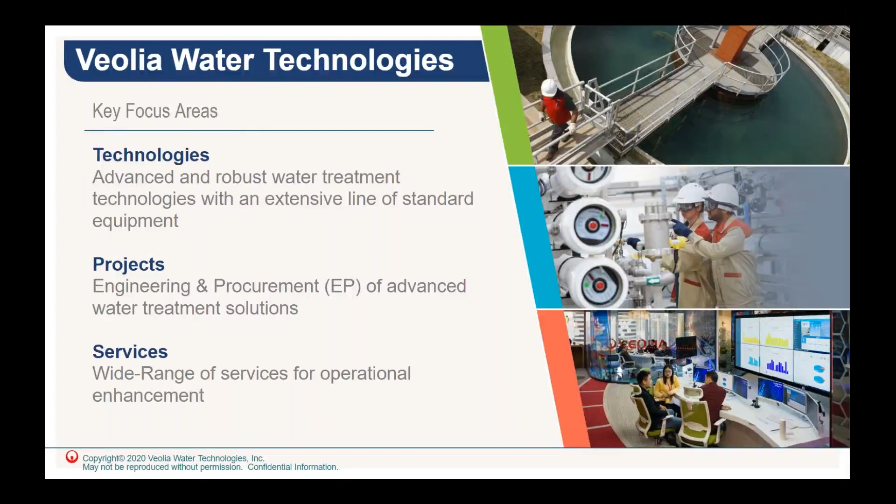First, we'll talk just very briefly about some common wastewater challenges. Then we'll drill in a little bit on the facility, with some background of the plant that we're mostly going to focus on today. We'll talk a little bit about the actual treatment technology that they employ, and then we'll really move into a discussion on the digital solution that they have implemented, and talk about the results that they've seen at that facility.

So, we have many challenges that our treatment facilities face around the world. Here in the US, in Europe, in Asia Pacific regions, we all have to deal with increasing loads, meeting compliance set forth by our national, state and local governments. And we all have operations costs that we are trying to reduce. Those are some direct challenges that we deal with.

We have indirect challenges that we deal with, and these have become more and more prominent every day, and that is changes within our workforce, turnover among our operations staff, the need to better train operators and to give them better tools to keep our facilities running smoothly. And a big part of that is taking data, and we have more data today than we've ever had before. We have better data, more reliable data, and being able to take that and get the most use from it.

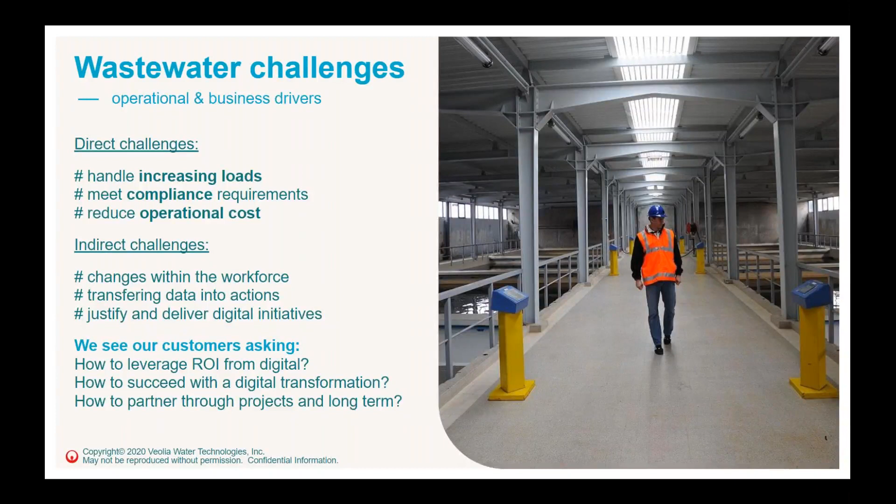To make the lives of our treatment facility operators and managers better, to improve performance, improve compliance, save money, etc. So the way that we do that is we focus on things that reduce energy costs, reduce chemical costs, and make manpower more efficient.

We focus on solutions in the digital world that will allow us to improve hydraulic capacity, and we see that in a number of ways. That is managing things better in collection systems to reduce overflows and reduce bypasses, and to get more flow through our facilities, doing so while hopefully avoiding significant capital expenditures, i.e. putting in a bunch of concrete.

Hand in hand with that, oftentimes there's a need to increase biological capacity. With the right digital solutions, we can affect change in that area as well, allowing facilities to get a higher biological load, more BOD, more ammonia through existing infrastructure, and do so with better effluent quality, reduced OPEX, and also avoid CAPEX - again, avoid adding concrete where we don't necessarily need to.

And we can affect change by increasing capacity in sewer systems. Again, that comes down to how we manage flows within the sewer system. That isn't so much the focus today, but it is an area where we can certainly have an impact.

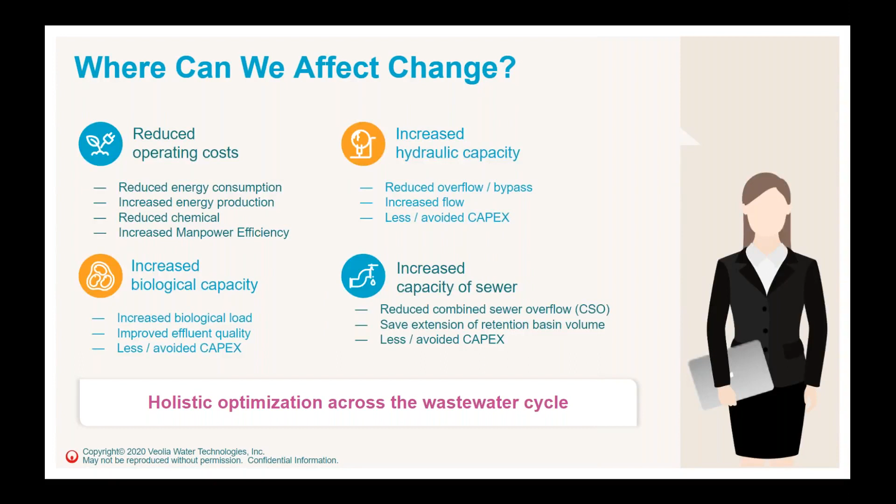So I want to talk now a little bit about the facility that we are going to focus on today. Louis will correct me, I'm sure, if I make any mispronunciations, which I'm likely to do. I do that with the English language plenty of times, so Danish - it's going to happen.

The facility we're going to see a little bit of information on today is in the Koge region of Denmark, an area just south of Copenhagen. You see a nice picture there of the harbor in that region. It's around 40,000 population in the main municipal area. The surrounding region that feeds to the treatment plant is about 65,000 people.

The facility we're going to talk about today is served by Klar Forsyning utility - I'm sure I just got that wrong in terms of pronunciation. The treatment plant they operate actually serves 4 municipalities, Koge and 3 others. Altogether, the capacity of the plant is about 5.3 MGD, and population equivalence is around 100,000.

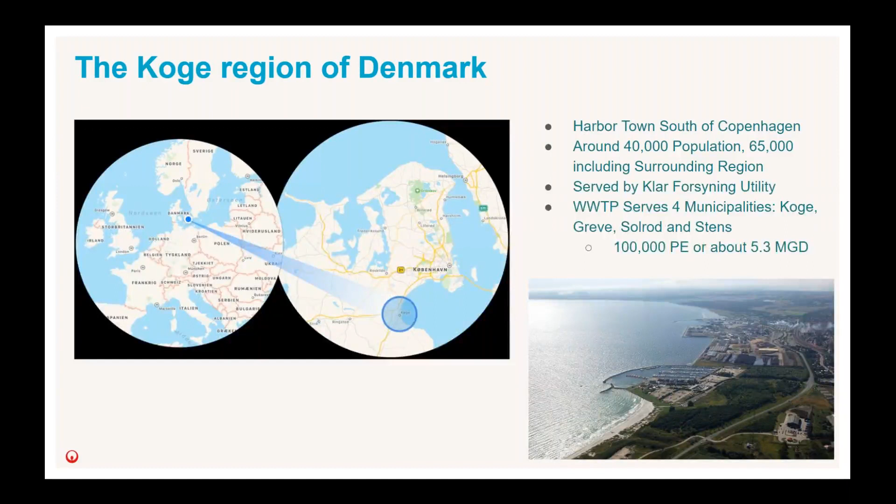Now, wastewater treatment in Denmark - they have a rich history in wastewater treatment. The Kruger business that Louis works for, I think, was started up around 1903 in Denmark, and has served Denmark and Europe and beyond for over 100 years now. So they have a very rich history in treatment.

In Denmark specifically, they really began implementing nutrient regulations in the 1960s. You can see here how they've had an impact on nutrient emissions with the implementation of nutrient standards back in the late 1960s. Many of those facilities, including the one we're talking about today, utilize oxidation ditch technologies.

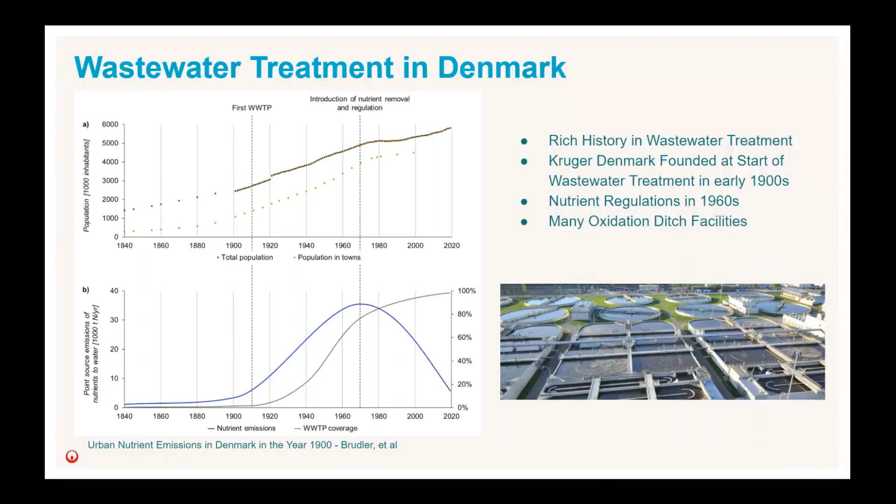I wanted to give just a brief introduction into a specific type of oxidation ditch technology that's employed a lot there. There are a number of facilities of this type in the United States as well. That is a phased isolation ditch technology.

Whereby you operate the system in a way that has a control strategy allowing the full volume of each ditch or reactor - there are configurations that do not utilize the racetrack style ditch, but utilize more conventional rectangular concrete tanks - to operate that entire volume either aerobically or anoxically, and also allows the system to flow in series through the main reactors, or in parallel, or just through one of the reactors, allowing another reactor to be fully isolated.

Here we see just a simple schematic of that process in oxidation ditches, and on the right you see a system currently under construction in Kansas that is 2 trains of the technology, train 1, train 2. These are some sludge holding tanks. This is post-anoxic zones. That technology is about a 4 MGD plant in Kansas that's under construction now.

And that will feature the AQUAVISTA Plant digital technologies that we're going to focus in on here today.

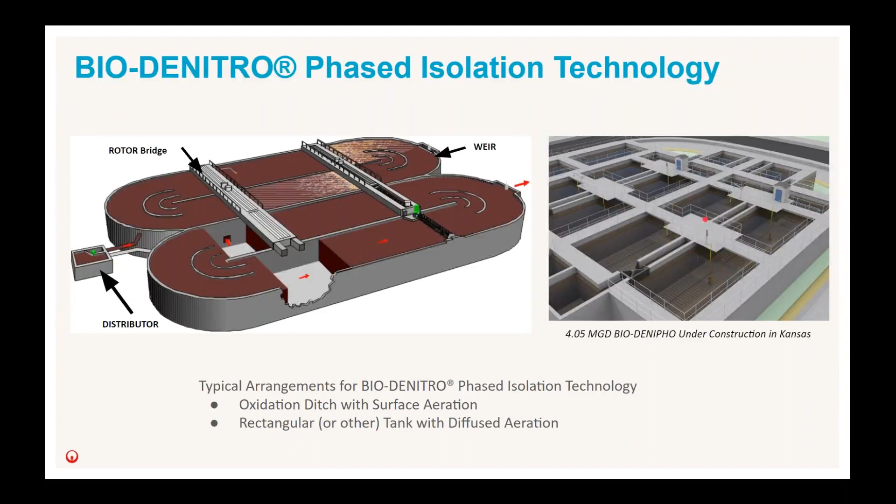A way to think about that technology is it falls between typical continuous flow processes, where you have continuous flow through the system and there's no phasing generally of the aeration. You have dedicated zones for an anoxic zone, a dedicated zone for an aerobic zone, and a secondary clarifier for dedicated settling.

We compare and contrast that with an SBR type system, which is a batch flow and phased aeration. Some of those systems do have continuous flow in, but they all will incorporate settling in the reactors, so it's intermittent discharge. They go through a phasing of the aeration to achieve aerobic and anoxic conditions in the full volume.

With the technology we're talking about, the oxidation ditches, they have separate mixing and aeration, so they do phase the aeration, but they are not generally settling in those reactors. They utilize conventional secondary clarifiers, so they are continuous flow processes.

But we do change how the flow goes through, so we can really manipulate it, and it brings a lot of flexibility to the system to deal with variable influent and variable conditions, and get the right reactor environment in the right place at the right time, to take as much advantage of influent carbon as we can, and to really drive nutrient values down to the lowest levels that we can.

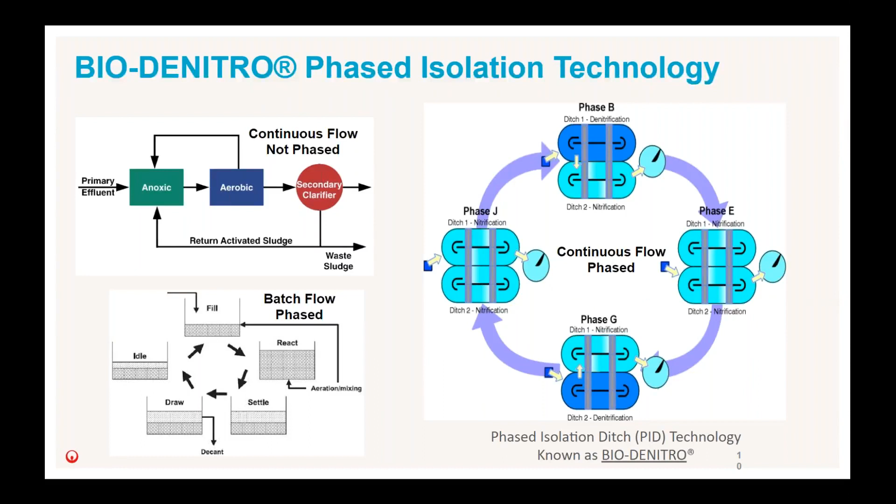So let's drill in here to the Koge plant in Denmark. That is a 5.3 MGD ditch system, as I noted. They have primary clarification, and their limits in place are 8 total nitrogen and 1.5 milligrams per liter of total phosphorus. So not super stringent on the phosphorus, but there is that limit in place.

They have undoubtedly experienced more and more an increasing level of I&I over the years, as they are seeing sea level rise to some extent. So that part of it is calling for some solutions that help them manage their wet weather better, and we'll talk a little bit about that.

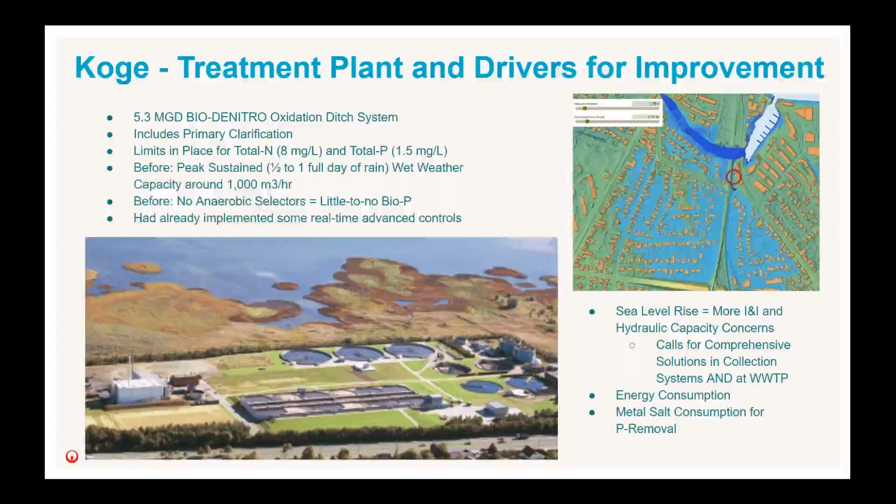So all of these things together combine to create room for a lot of optimization, and there are different ways to approach that optimization. The facility tried different meters to help with energy efficiency, and they tried that real-time control. They didn't see a whole lot of improvement with that.

With the sea level rise, they've experienced clarifier washout events. So some of the other solutions you might think of off the top of your head: add some additional secondary clarifier volume, or add anaerobic selectors, or add additional retention basins out in the collection system to equalize wet weather flows, and go that route to minimize sewer system overflows and better manage flows as they come into the plant.

And from a total nitrogen perspective, add potentially additional treatment volume. So all of those types of solutions come at a high cost—a high capital cost—and don't necessarily address energy efficiency or excess chemical costs. Those are pretty significant projects to undertake.

So the question was, is there a way to approach all of those issues with a digital solution and have an effect on energy efficiency, on chemical consumption, on biological phosphorus removal, on management of wet weather flows, and do so without putting in all of this concrete and rebar and additional infrastructure? And it turns out there absolutely is.

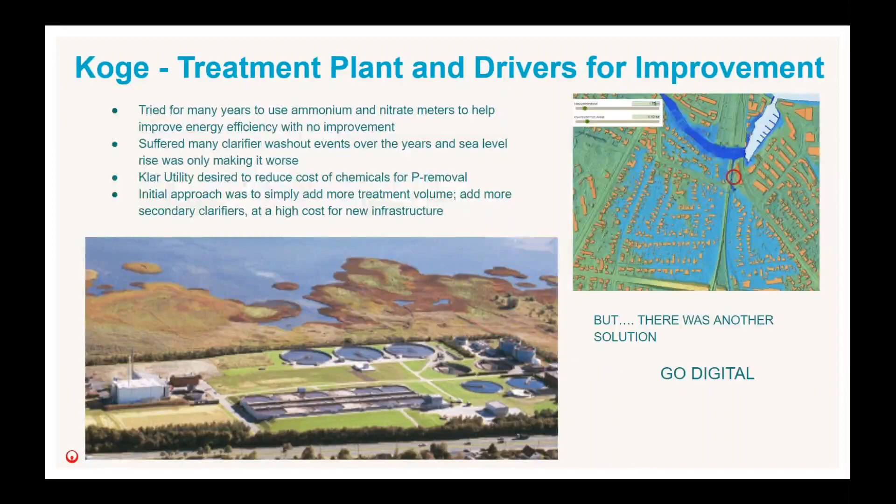We have implemented what we call our AQUAVISTA Plant, which we view as optimization as a service. And with that, I want to turn it over to Louis to talk a little bit in detail about what we offer with AQUAVISTA Plant and what it is.

Thanks a lot, Mark. Great introduction. Thought you also did well on your Danish.

Thank you. So yes, AQUAVISTA Plant Optimization as a Service. What I mean by that is, this is a tool created by Veolia Water Technologies and Kruger, developed over the years. This is a digital tool that really aims at answering all the problems and issues that Mark highlighted earlier. So it's both something that can deliver optimization for wastewater treatment on OPEX, but also on CAPEX savings.

And as you see on the half wheel on the right side of the screen, you can choose to have the product provide the service with different aims. So it can be regarding the water quality in the effluent, it can be regarding the chemical dosing - pretty much as Koge, where they were dosing quite a bit of chemicals to reach their P consent - the biological capacity, and the energy savings that Mark talked about.

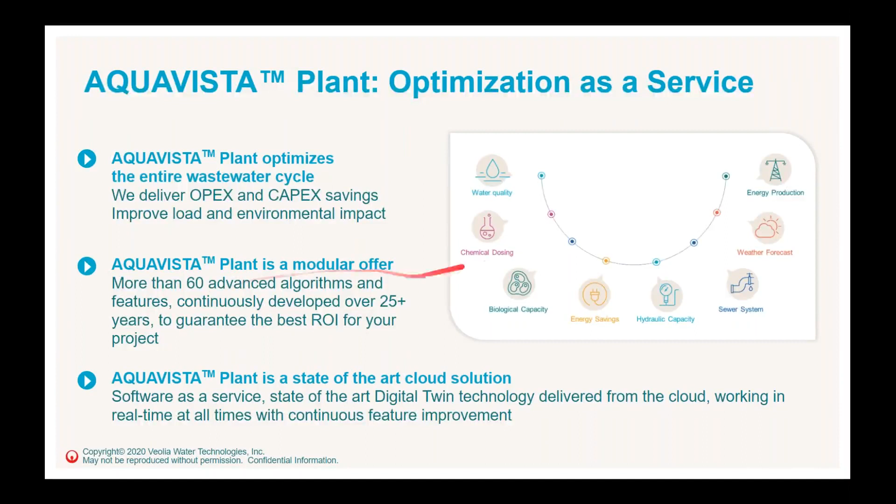So the system and the platform is built in a way that it can adapt to any kind of needs, so that supports this modular offer. There are embedded into the platform more than 60 different algorithms that have been developed over time. The first ones were thought of back in the early 90s, and since then they've only been getting better and more innovative, and we've kept on building on it to provide this optimization.

And any plant can identify their problems and then put together the right mix and match of algorithms to provide the best ROI, basically, on a project to solve this issue.

So AQUAVISTA Plant is a digital product, as Mark said, so it works as a software as a service. You guys are probably all very aware of it - it's kind of like your Netflix account. You subscribe, you get the service, and if you're happy, you stay subscribed. If not, you unsubscribe. So it's a very user-friendly tool and way of looking at optimization for wastewater treatment.

It's based on a state-of-the-art digital twin technology, so it's really creating your whole plant up in the cloud to best provide real-time optimization delivered from the cloud to your asset. And it works in real time, so everything is updated, calculated and rerun within a 2-minute time frame. All the data put together in the algorithms is running 24/7, 365, to always keep track of how the process is going.

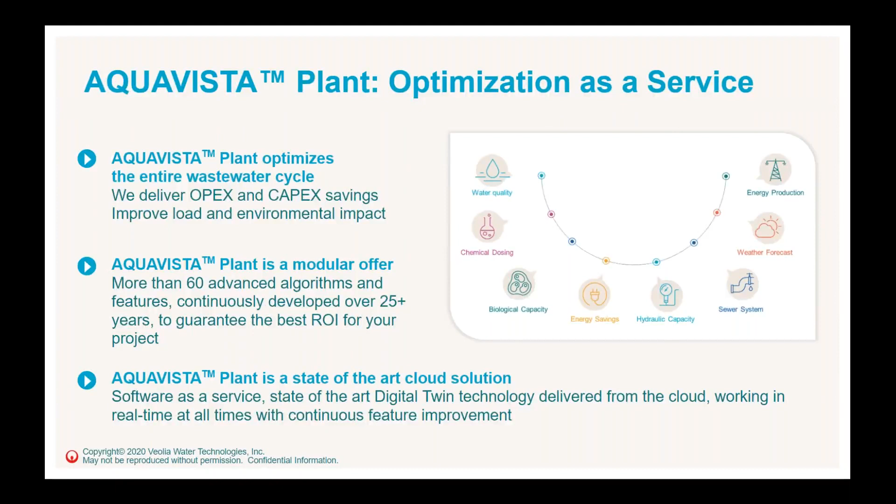Thank you, Louis. So with this digital service, as you mentioned, there are more than 60 individual algorithms, and we have facilities where we've applied just 1 or 2 that are really targeted on one specific technology or one specific product, to implementing a dozen or more of the algorithms that are all working together to optimize across a range of unit operations in a plant and out into the collection system.

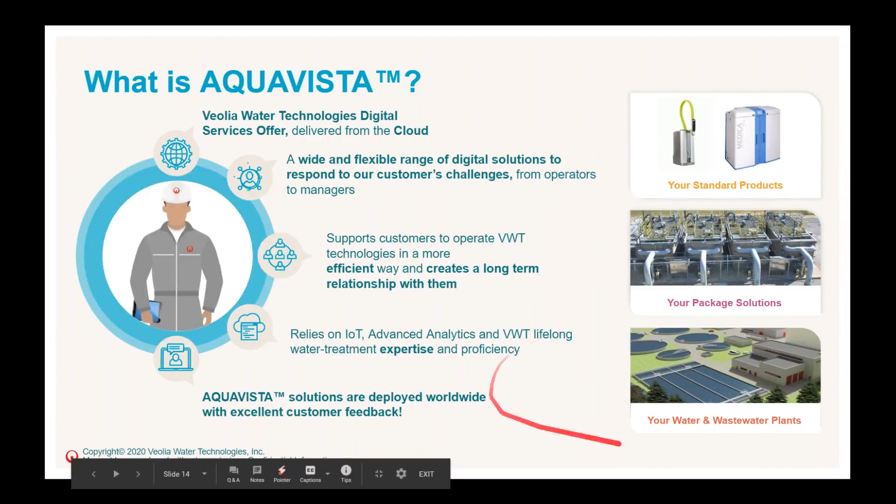It all relies on IoT, advanced analytics. As Louis said, we have these algorithms that have been developed that are running this digital twin in the cloud. We work through Amazon Web Services to deliver this to the facilities, and it has proven itself in dozens and dozens of installations over the years to deliver very high results.

Just one quick mention about some of the logistics of how it works. It is a cloud-based system that is running all these algorithms. It has this digital twin that is taking all the data we're feeding in, and it's identifying in real time new set points. It may be a DO set point, it may be a blower operating speed set point, it may be a pump flow rate set point - just depends on the full range of solutions that have been implemented - and it automatically loads those into the new PLC on a real-time basis.

It includes a user interface that has different levels for operators, for engineers, for plant managers and oversight staff to view various KPIs, and can see the big picture or the very small drilled-down picture as appropriate for the individual that is operating or using the system.

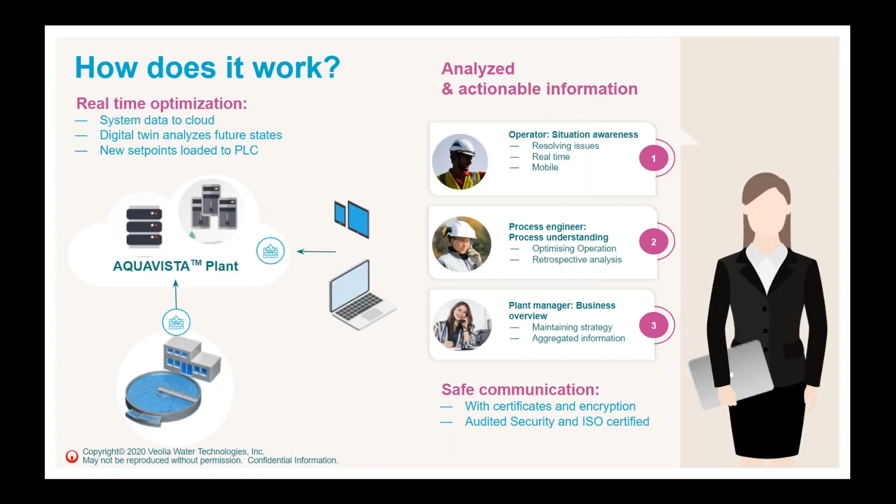Louis also mentioned it's been developed over a wide range of time. We've been doing this since the 90s, and it was implemented at that time on a server located at the plant. Obviously, there was no cloud component at that point in time, but it has been cloudified within the last 5 years. And what that does is it actually makes it much more efficient. It's less costly. And it makes it easier to take advantage of updates, as they can very easily and simply be downloaded. So you always have the latest and greatest information, the newest version of the algorithms that are running and optimizing the various unit operations.

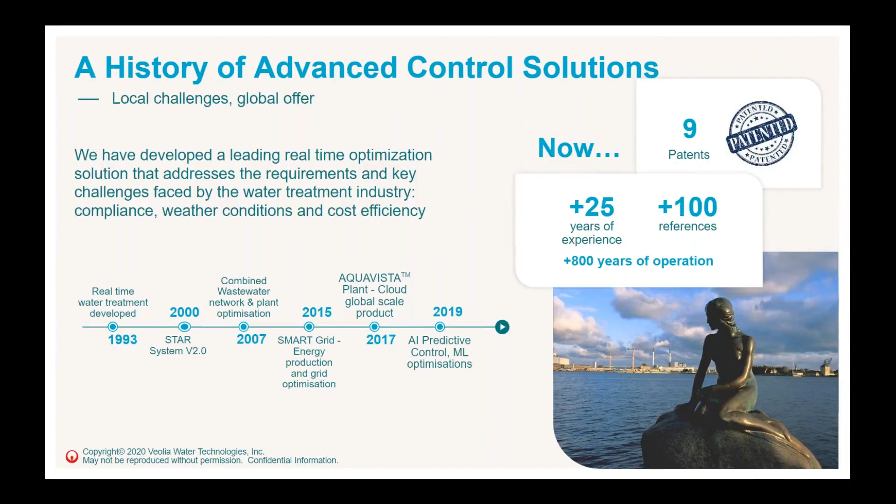The results that we've seen, just in general, we see an average of 10 to 30% lower aeration energy when we're employing it in a secondary treatment system, 25 to 75% pumping and mixing energy reduction. There are grit separation specific modules and have seen improved separation with a big reduction in energy on the grit chamber aeration. Very significant chemical savings, less sludge production because we're feeding less chemical to achieve the same types of effluent phosphorus and effluent total nitrogen.

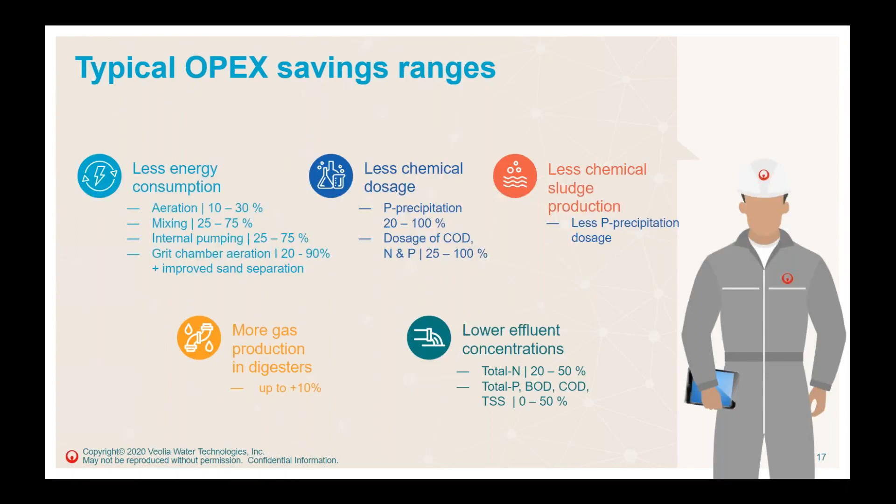There are anaerobic digestion specific modules that improve gas production. And all of these work together in any facility to produce better effluent concentrations and better compliance overall. We also see significant increases in capacity, and we have implemented the solution specifically in many instances to achieve these types of capacity increases. These being the primary drivers on a project to say avoid building an additional treatment train or avoid building an additional secondary clarifier.

So once you have the right data and you have the right algorithms, which we do, which we've tuned over many, many years, and we've done that from a wastewater perspective. At our heart, we're a wastewater company. We're not a data science company, although we certainly employ some data scientists to work on this particular product. But we're coming at it from a wastewater perspective and have done so in building these algorithms. So when we have the right data, we can affect some very significant change and improvements in these facilities.

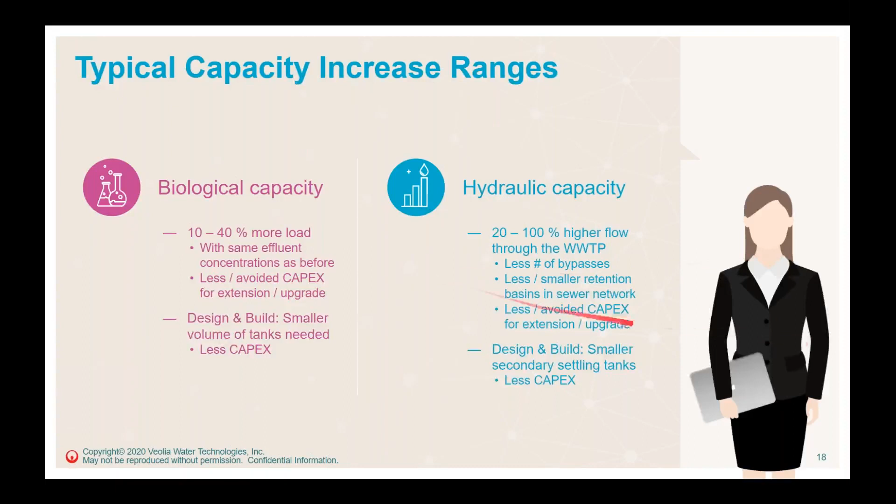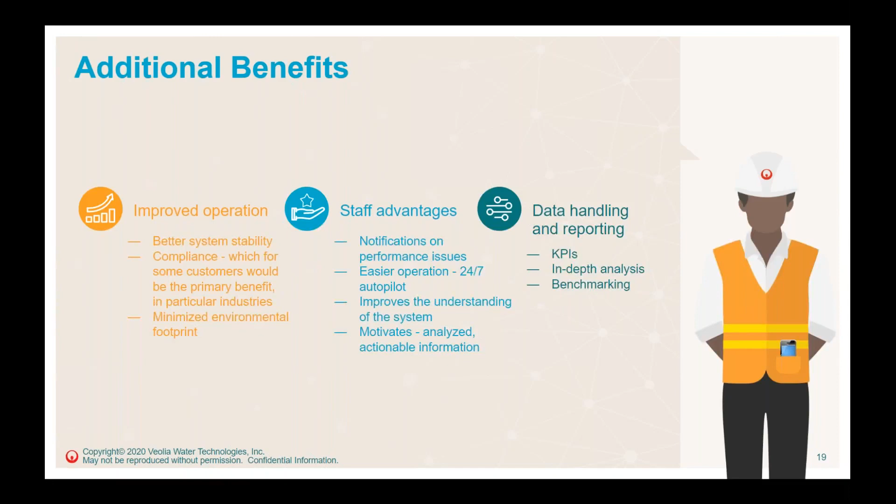And all this leads to some additional benefits beyond just what you see in numbers in terms of chemical consumption and improved capacity and those kind of things. The better compliance, more stability, better overall settling, and staff advantages, and being able to track and monitor performance better, at the big picture, at the management level. The best reference or the best tool for us is our customers, and we're always willing to get our prospective customers in contact with existing users to talk about their experience. We have I think a great track record with that.

So enough about that. I think we're going to move into some more detail here. This just summarizes really kind of the heart, a lot of the key modules. I'm not going to go through these one by one. I'm just going to pick out a couple examples, and then we'll talk in specifics about the results at the Kruger plant and what they implemented. But you can see there are modules that have been in place for many years that continue to grow and that all work together to optimize a plant. Again, at a particular facility, depending on the objectives, just one or two of these may make sense to implement. A dozen or more may make sense to implement.

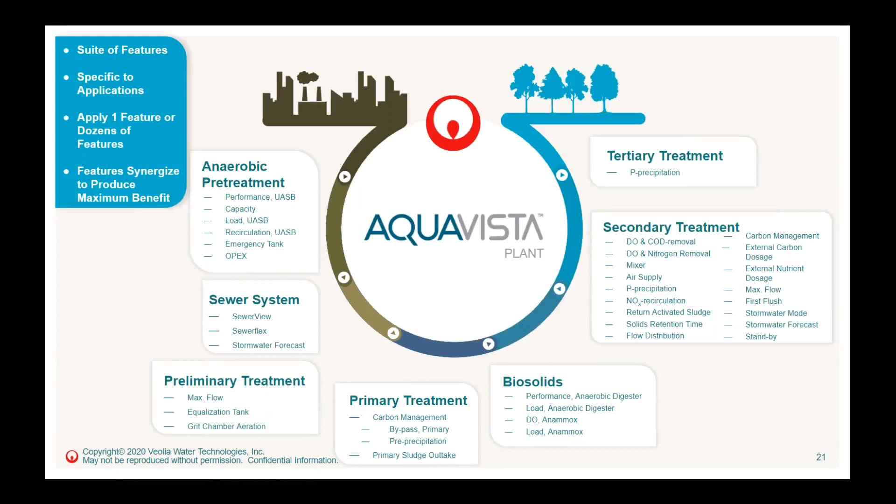The more you implement, the more it will build on each other and better optimize the facility as a whole, and also out into the collection system, and really treat the collection system and the plant as a single entity, and optimize that all at once. So I want to give one example of a common approach to where we affect change. So, there's a stormwater control module, and there's different levels of that. It can be very simple, and it can get more and more elaborate, and it all depends on the data that you have available. If you have a system and you have a certain flow capacity, say before your clarifier is going to wash out, that probably is what it is.

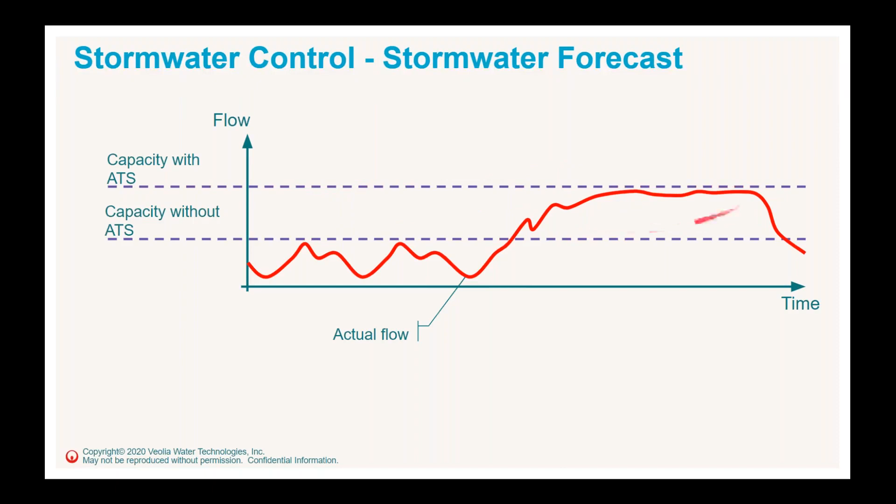And ATS here means aeration tank settling. A common method that some plants use is just to manually, if they know they're going to get washout, turn off the aeration in one or more of their aeration tanks, build up some solids there, reduce the solids loading on the clarifiers, and that helps. That requires manual intervention and can certainly be managed better and can be automated. So if you've got a plant and these are your actual flows, this whole period here above that dotted line represents potential clarifier washout time, right? Well, you implement aeration tank settling, you can head off and avoid that. But the problem is you might not implement it in time.

If you're manually implementing it, or even if you're automatically implementing it, say just off of a flow signal at the plant, there's going to be this period of time potentially as you're transitioning aeration tanks to settling where you're still susceptible to some washout. So the question is, how can we better anticipate the flows actually at the plant? And there's a variety of ways that we can affect that, and they just get more and more fine-tuned depending on the type of data we have.

So there are proven algorithms that we build in with our flow forecast that go along with the stormwater control mode that take data from rain gauges out in the collection system, from weather APIs to build forecast data in, and use those to identify when's the right time to implement some aeration tank settling, and do so fully automatically, and help that facility weather the storm, so to speak, and minimize risk of washout.

Again, that's been perfected over many years and works exceptionally well, and takes some of that burden off of the plant to try to figure out when to start implementing things. It can just go and do it on its own. So that's one example of how we're utilizing digital technology and these advanced algorithms to improve what's happening at the plant based on better data.

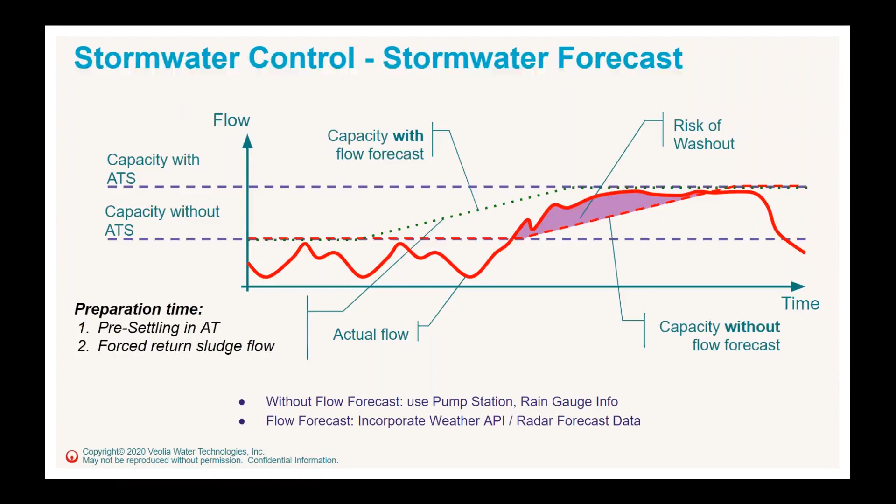We're going to get in a little bit more detail. I'm going to turn it back over to Louis to talk about specifically phosphorus removal and what we're doing with that, and the solution ultimately that was implemented to affect change at the Kruger facility. And then we'll wrap it up with looking at some actual numbers from that plant.

Thanks a lot, Mark. Yeah, so we just looked at the stormwater, and as we mentioned earlier, all these modules and algorithms can work together. The idea is to adapt the plant to any kind of situation it's in. You're going to have fluctuating flows throughout the day, throughout the year, with different contexts. So how to best adapt the process to the state it's in and maximize the use of the concrete and the assets you have there.

So a focus on biological phosphorus removal here is that we know that during a day, most probably there's going to be fluctuations in the plant, and we want to look for times where we can enhance the biological P removal in existing volumes. The idea is not to build more, it's to use it smarter, wiser. And so that's the why. And how do you do that? Well, we try to find time slots, usually during the low load time frames, for example during the night, where your plant is going to be operating below capacity. So you're going to have some spare biological capacity somewhere in there.

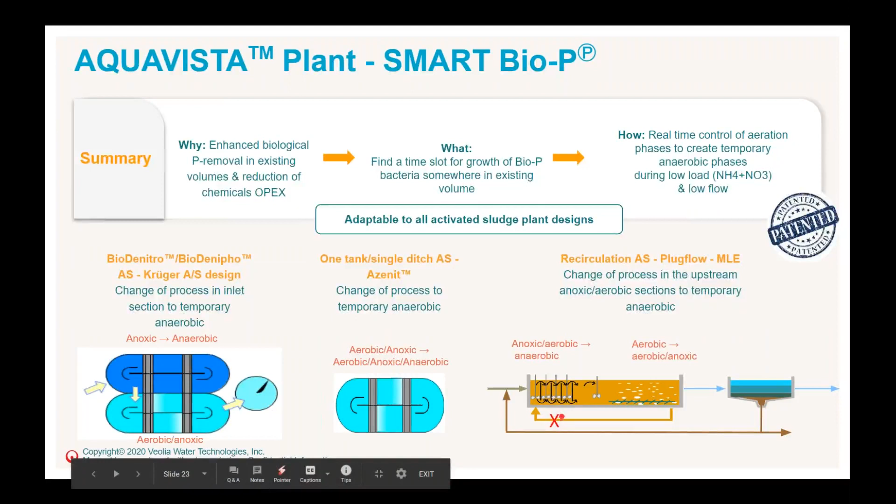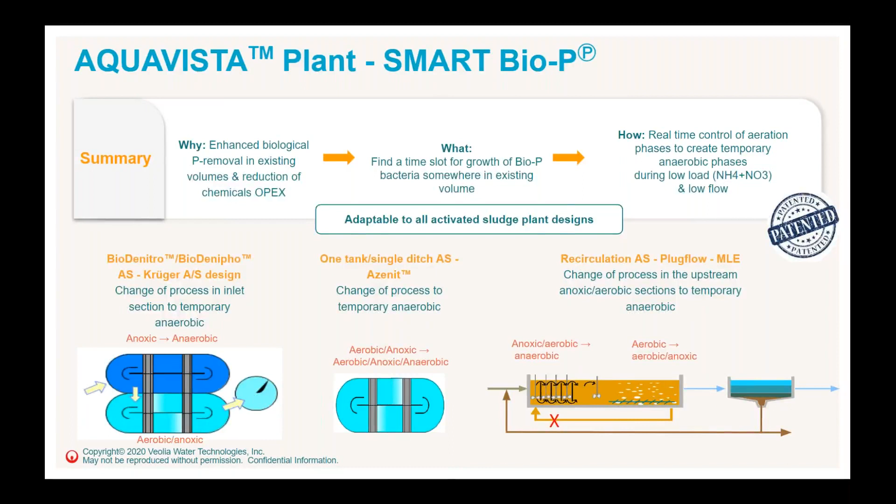You'll see with the little crossed X on the orange line there, so that we don't return any nitrates from the end of the tank to the beginning where we want to create anaerobic tanks. So we'll have dedicated anaerobic tanks in the beginning where we don't recirculate anything. And then you have your anaerobic conditions for your bio-P growth. And so that's kind of how we in live work on this stuff.

But it's not only one thing that makes the bio-P process possible. You could think of AQUAVISTA Plant somewhat like making the orchestra of your asset play in tune the best way, to play the partition correctly. So all the algorithms together are going to be better if they act according to each other and according to what the process needs.

But if you also have mixers in your anoxic zone, you might have a second algorithm and a second feature adding on top of it as an additional benefit to stop the mixers, to increase the hydrolysis rate. So you'll have an increased hydrolysis rate and you'll be saving on your energy by not running your mixers.

Ultimately, also, all your process is based on how much bacteria you have in there. So that's your solids retention time and your return activated sludge. You want to make sure that you have the right sludge age and the right sludge amount in your tanks to do the bio-P removal, to reach your compliance in the effluent, and not have to over-aerate by having too much sludge in the system. An algorithm like that will make sure that you have the right balance between those three.

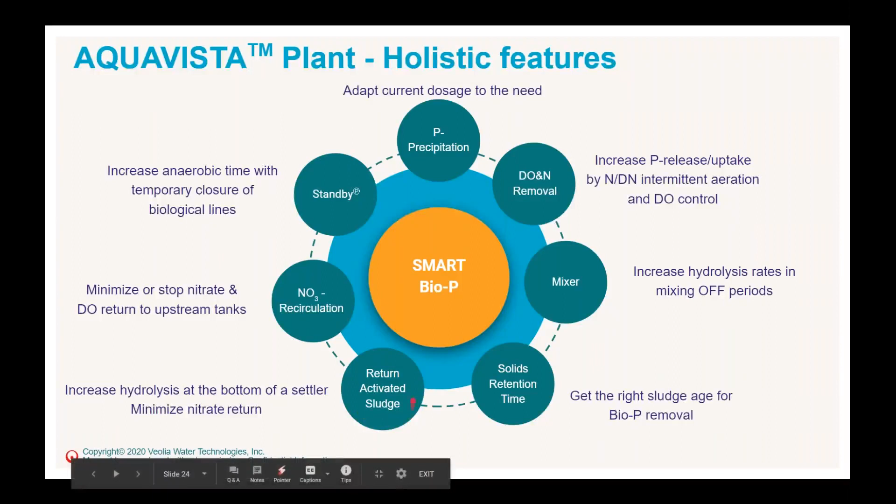Same with the return activated sludge. So how much are you pumping back? Because sometimes you don't want to be creating unnecessary constraints on the system by returning too much. So here you could increase the hydrolysis at the bottom of the settlers by minimizing the return rate.

In our recirculation plants, as I showed before, you have your internal recirculation, your nitrate recirculations. Well, you need that extra feature to play together with the DO and N removal feature in a recirculation plant to make sure that you can achieve this anaerobic condition in the beginning of your aeration tank.

The two final ones in the wheel here: there's another patented feature, standby. Essentially, if you have a plant that sometimes is operating far below its design capacity, you might actually be able to just do the job on half the lines. If you have two lines, you could maybe just do it with one and save a lot of time of operation for aeration and mixing.

But essentially also, if you can put a separate line in total standby, in pause for a couple of hours, that is always dynamically in real time able to come back into operation if the load to the plant requires that, well, you're creating one huge anaerobic volume for your plant to prepare for the process at a later stage. And this is done dynamically. So it can be one line, it can be the other, it can be for just an hour, it can be up to 4, 5, 6 if needed, always dynamically ready to come back into operation.

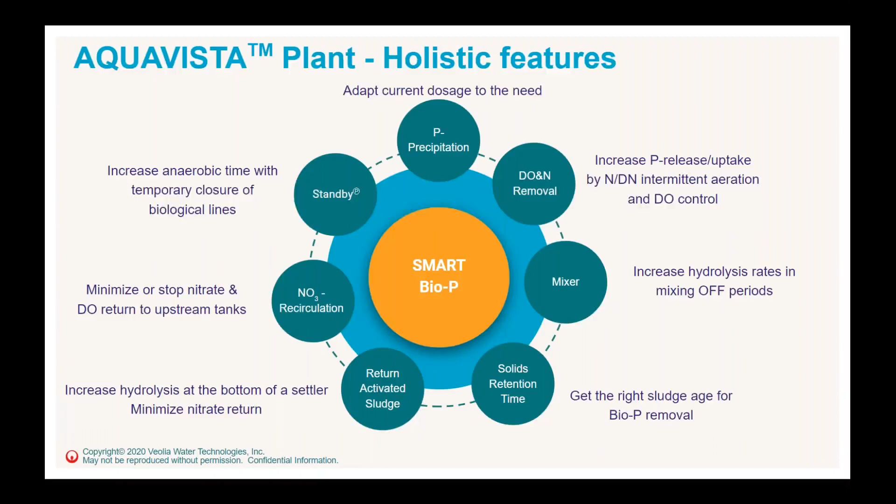And finally, if the whole bio-P process can't take it all, you're going to have to dose something. And let's just make sure you don't overdose by having a P precipitation algorithm telling your pump, well, now we need to dose this much. Not too little, not too much. So it's all well and nice.

We've kind of gone through the logic behind how we provide this optimization. How do you make it possible? What did it look like in reality for the Kruger plant here? So as Mark said, it's about 100,000 PE, and they were really struggling with three main things that I'll repeat to you guys. So first of all, in Denmark, you have to provide operational savings every year. That's the requirement from the government. So every year you have to think of a smart way to save a couple bucks.

That was one of the issues. The second one is that, as Mark said, they were struggling with the sludge escape from their secondary settlement. And not only were they struggling with the secondary settling tanks during stormwater events, they were handling everything manually. So the guys at the plant sometimes needed to wake up at 4 in the morning and get to the plant, all hands on deck, to try and get the plant through this stormwater event.

Denmark's a very rainy country, so really when it rains, it pours. So this was also a strain on the operational team, that every time there was rain, they needed to come to the plant and make the best of whatever they could there. So those were really the 3 main drivers at the beginning.

And by using 9 of the different features, some of which are the ones that we showed you before, so DO&N removal, solids retention time, return activated sludge, and P precipitation, for example. Those are a couple of them. Stormwater, of course. We replaced the existing real-time control that they had implemented, which was delivering just very little OPEX savings. That was pretty much what they had achieved with that.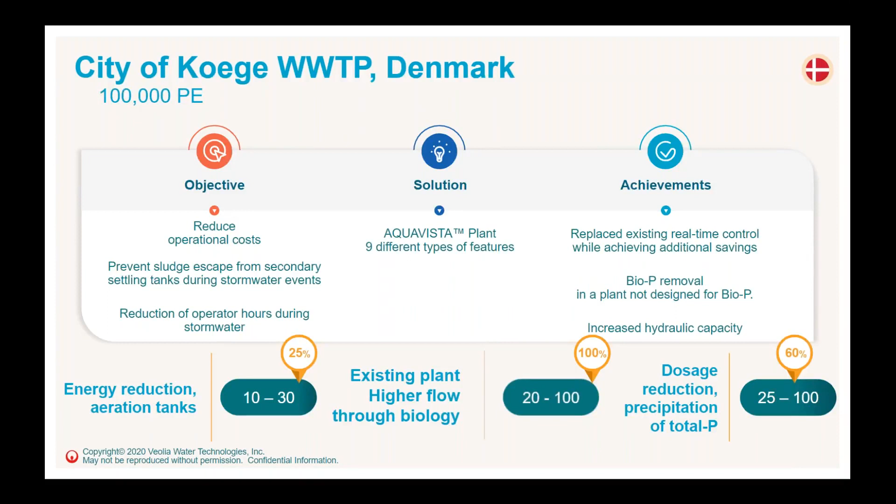Absolutely. And you had also mentioned, being in the cloud, the ease of delivering added value through additional modules, additional algorithms being implemented down the road. They're adding a couple new ones. I want to wrap this up with just one final thing. One of the ways that we do that, and they haven't implemented this at that Koege facility, is what's called AQUAVISTA Lab, and this is a collaborative platform that allows our AQUAVISTA Plant customers, if they choose this option, to work on and develop their own algorithms,

and we can essentially partner up to identify new ways to set up advanced control, and in the digital twin environment that's created in the software, be able to fully test it and confirm how that's going to work. And that is, I think, a very neat feature to add some value on top of what's already generated and what we're generating as time goes by. So just wanted to make one final mention of that.

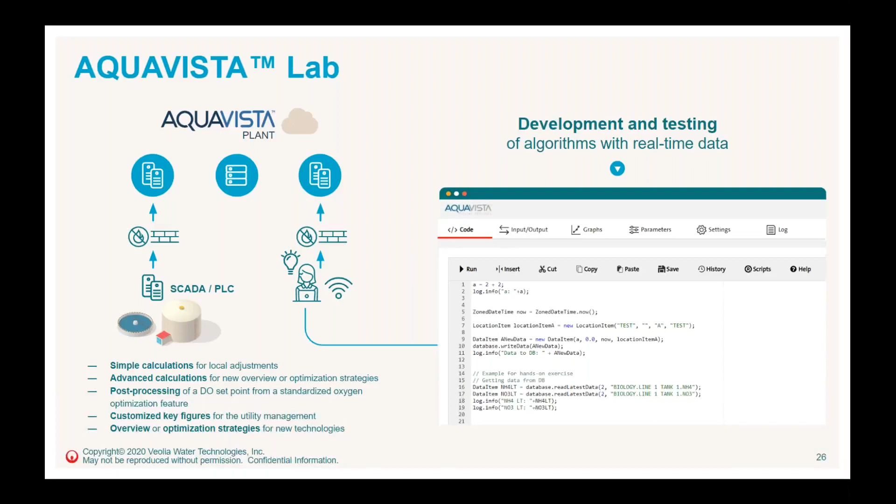First, is there any study or report that shows the optimization results in terms of dollars saved by wastewater treated? A report that puts it into dollar values. Louis, I will defer to you on that. Do you guys have any, whether it's internal or a third-party consultant, or a paper presented at IWA or something, that takes the savings percentages we see for a given facility and generalizes and breaks those down into a euro or other currency basis?

So just for me to be sure that I understood the question, were the percentages presented here translated from something that was a euro value, or what's the usual range of how much this represents?

So yeah, I can't read too much into the full context of the question, but I think what it's asking is if we can have quantified dollars per cubic meter per day savings, something on a general, real financial basis, as opposed to just actual percent energy or percent chemical. I mean, it will depend on energy rates, it will depend on chemical rates, and those vary from place to place. But do you know of any reports that really focus in on dollars or euros?